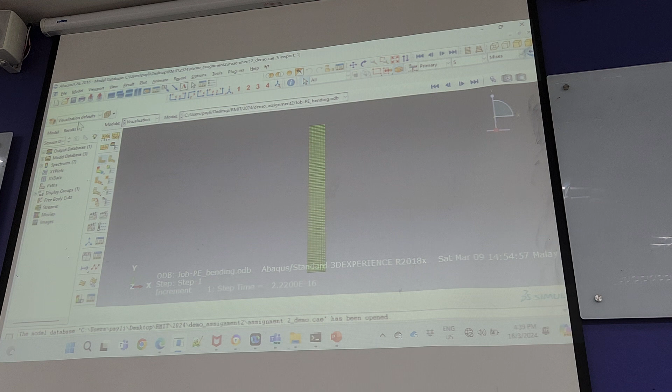Okay, class. I just want to say this very quickly. Okay, let's say this is the result that you have, right? You will see that there's a stress concentration here. You notice that there's a stress concentration here.

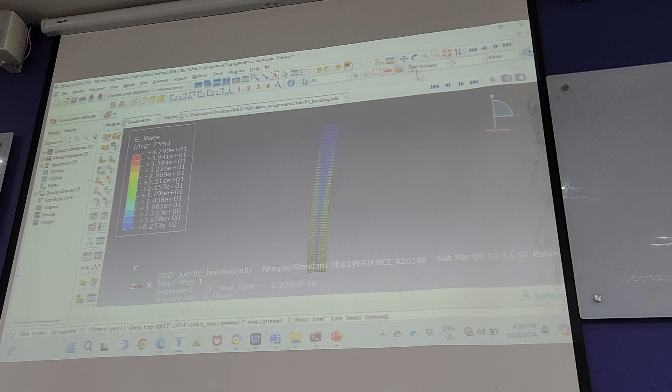There's a stress concentration here, okay? So does this result make sense? No, it doesn't, because we are adding it as a point load. In reality, it will be a distributed load, but for simplicity, we add it as a point load, okay? So first and foremost, that's why I wanted to put it as a bending stress here first, okay?

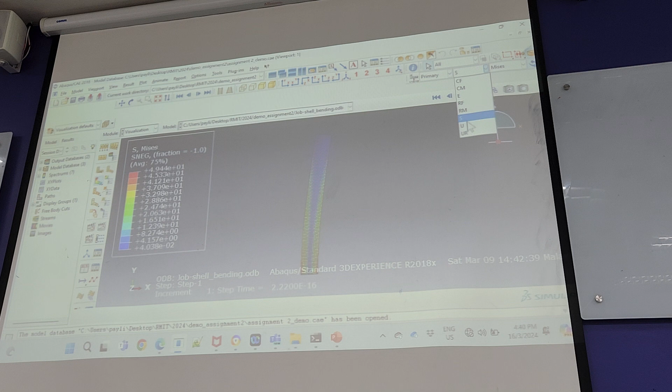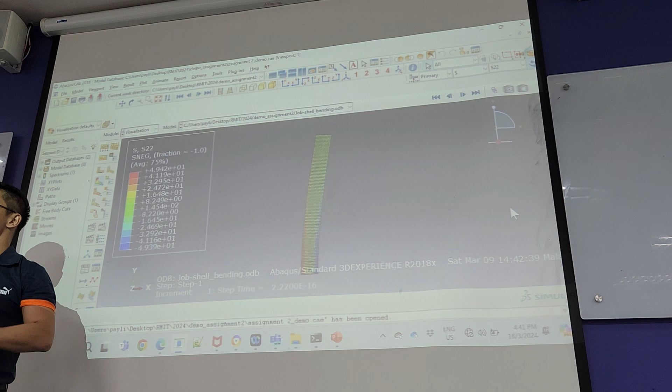This is for the shell model, okay? And you see, just now I showed you that there's a localized, very localized stress concentration, right? And that's why I did it as a pure bending load first, so that you can see that this is pure, before you make sense of the magnitude, because the magnitude will be a little bit off, within 10% or a few percent off, okay?

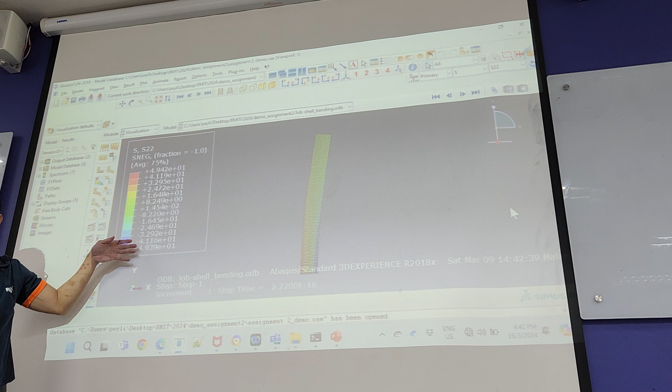But I did it as a pure bending load first, I would rationalize it this way: this needs to be performed as a pure bending condition first, whereby the compressive and tensile loads are balanced. So they show that it's a pure bending load, which is important. It's not easy to get the magnitude to be exactly the same. Sometimes it might be off for various reasons. But to do it as a bending load, that's why it's important.

For your case, your validation is up to you how you want to do it. But if you want to do it together with axial load, like the way I showed in the example, that's also fine. Then you need to justify why. It could be like what I said, the rigid body motion restraint. The thing I want to show you is here.

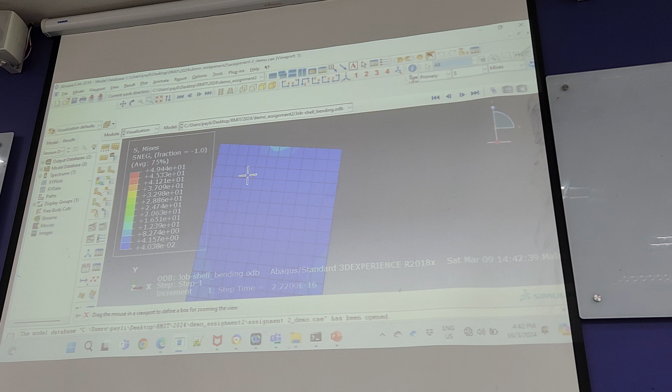Okay, so imagine the localized stress that we see here, at this point. Why does it happen? It's because, like I said, it's a single point. How do you resolve it? Does it mean that if I have a finer mesh, now I have 10 elements along the width direction, if I increase the number of elements, will it improve the situation? Yes or no? Why not? Because the small point will still have the same amount of stress.

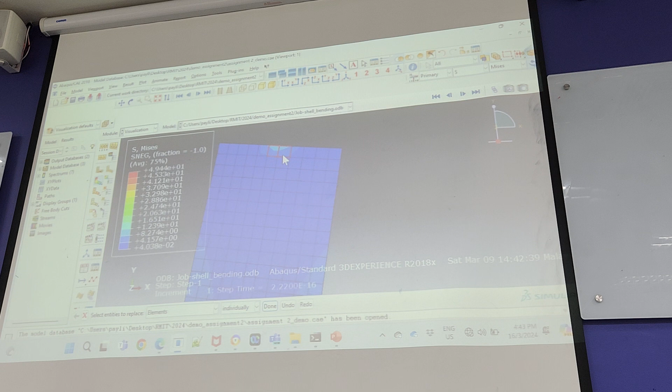That's one. Now you see, this is localized, right? So if I check the stress here, this stress is about 12 megapascal, correct? So it's still relatively small compared to the entire stress, but some of you will have a very different stress. So what will you do if your stress is too significant? I did it in the 3D model because it becomes very significant.

So what you do is you just remove that section, you remove the top section. Because I'm not interested in that stress there. I'm interested in the bottom here, the stress at the bottom. That is really artificial stress. But what I want to illustrate to you is, if you increase the number of elements, let me go back to mesh. It's just not shell, right? It's not shell bending, right?

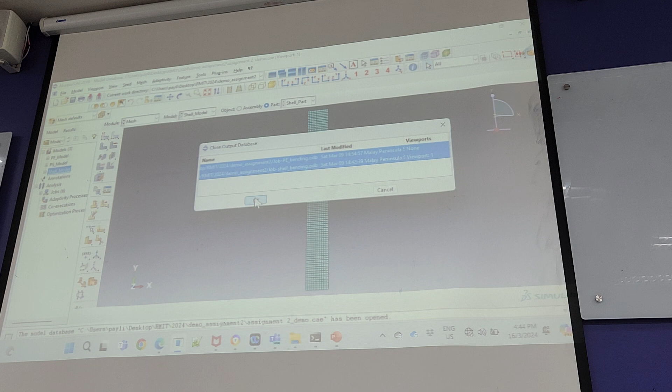Axial load together, of course, it will be higher. So you see now this is very high. Let's say if I were to look at only the stress in this configuration. The stress here is about 56 megapascal, which is quite significant compared to overall. So you see that now 56 megapascal is the stress at this location here.

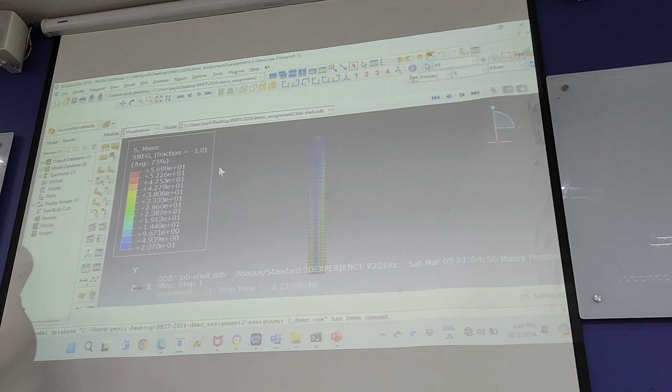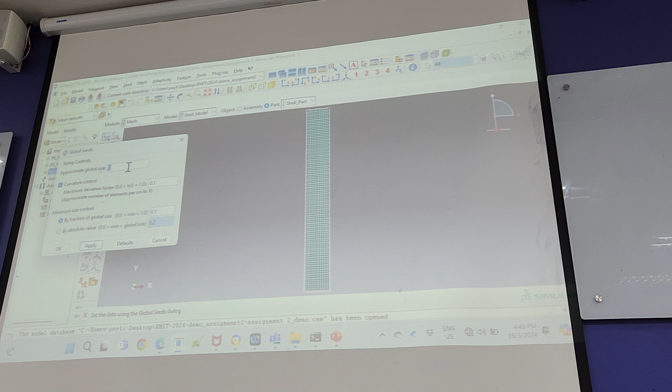So what is the actual stress? For the actual stress, we must remove the top part. So it's actually 54, not 56. 56 is because of the load at the top. And I want to show you something. Now, if I was to increase the mesh, just now, with the top, what is the stress at the top? 56. Yes. Okay, 56. Let's do it again.

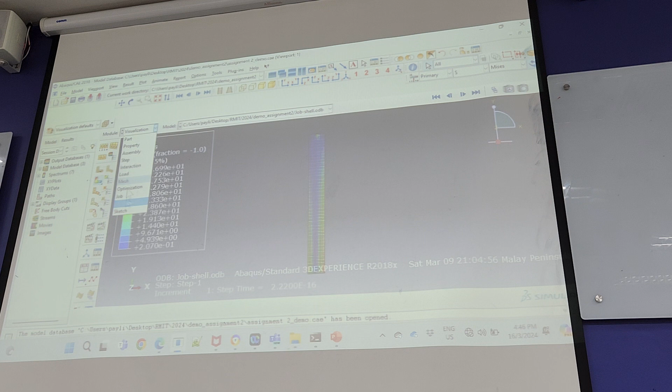6, right, at the top. I will ignore the top because that is an artificial stress. In reality, it will not be a point load. The answer is 4. Your actual resistance stress is 4, not 6. But with the top, 6. If I increase the elements, make it denser, previously it was 2, now I think it's 1. Okay, I run it again.

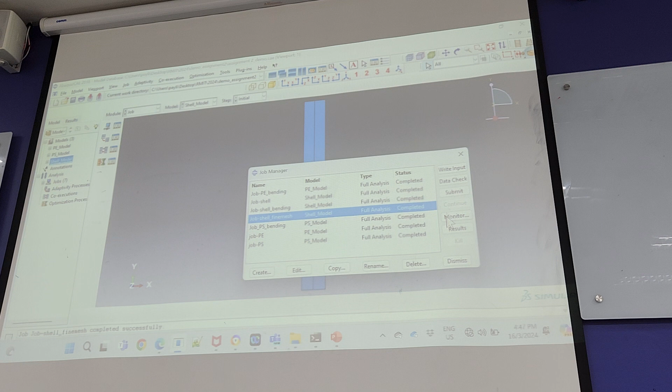Wait, before that, let's take a look at it. Just now it was what? Remember the stress? You see, 56. Now what is the stress here? 114 now. Let's zoom in now. Stress at the top is what? 114. So the stress increased by how much?

Double. Twice. Why? Because originally, when I told you it's an artificial load, you input a point load, there's nothing wrong with that. But in reality, nothing is applied as a point load, infinitely small, as a very fine point. No matter how much load you apply, there's always a contact surface. So that load will be distributed across the contact surface, but now you're assuming it as a point load, which is 0.001.

So that is 56. When I increase this density to something even finer, this is n equals to 2, this is n equals to 1. The global seed size is millimeter. That means this load will be handled by one element 2 by 2, and now by 1 by 1. So of course the contact surface shrinks by half. This is called localized stress. The localized stress will be even higher.

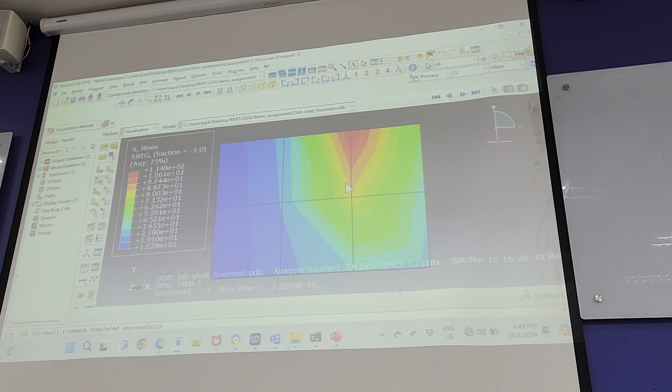You know what I'm trying to say? So this is the stress. That's why when you come out with the figure, suddenly the maximum result will jump, and it could be due to this localized stress. Most of the time your error is because you don't have sufficient mesh density. Just now we said 2 elements across thickness is not good. But if you have it too fine, you could have things like this, which is okay. We just need to remove the top layer.

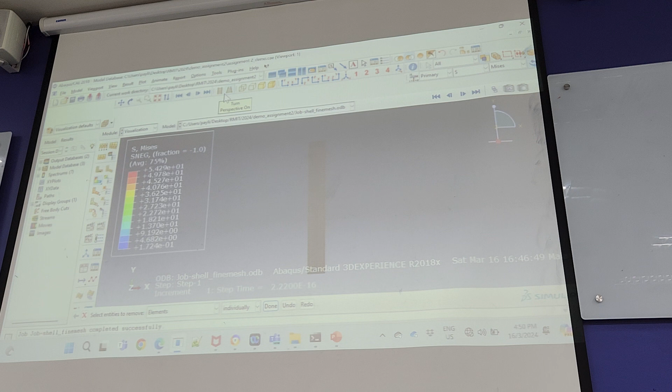If I was to remove the top, the result is exactly the same as what we had just now for the 2 by 2, 54. So the 54, which is the bending stress at the bottom, is correct. But by removing it, the deflection will get affected? I can't hear, somebody is talking right beside you. By removing it the deflection will get affected. No, only the stress.

No, you're right, it does affect. Do you all hear the question? By removing the top layer, deflection gets affected. Yes, it does, because your top will see the highest deflection. That's a very good point. So when it comes to the deflection, you shouldn't remove the top element. You should remove it only for the stress.

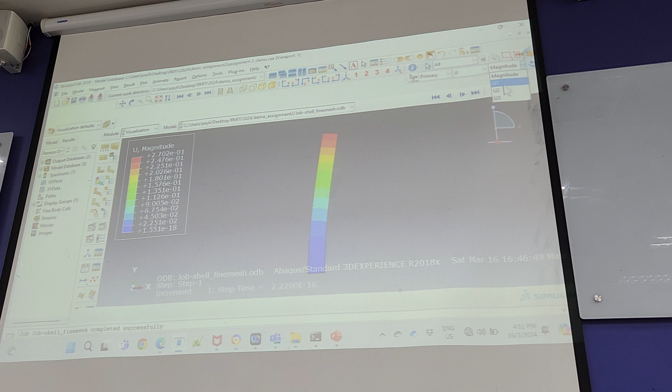So let's put it back again. Wait, let me finish first. If I go back to the displacement, the displacement doesn't see a concentration. Only the stress sees the concentration. You only remove it if there is a stress concentration. Now the displacement doesn't see anything. But if you go back to the stress, you see the concentration there. So it's only for stress concentration.

So is it going to affect the whole model? No, the model is the same. That removal is only for display. The model is still the same. It's just like zooming in to focus, like what I did. So next time I can just open the report and it becomes a normal one? Correct. Everybody understand that? That's a good point.

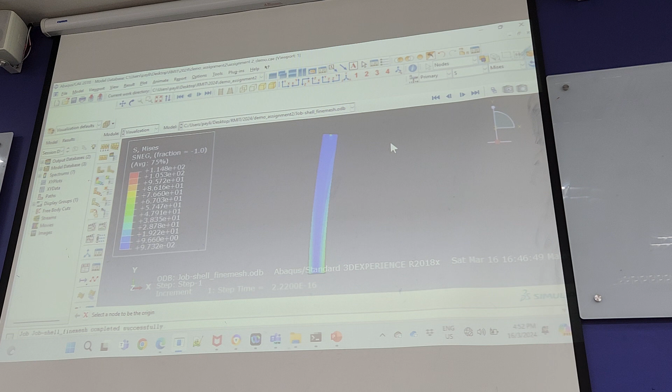Okay. So what I'm going to do now is, I'm done with assignment 2. I want to go through very quickly this entire module and a flavor of what to expect in your exam.

Yeah. So what you're going to have in the exam is 3 sections. Okay, one is on the calculation. Can everybody write it down? Okay, everybody write it down. One is on the calculation, which is your direct stiffness method, another one is on the beam and truss, and another one is on the plate and shaft.

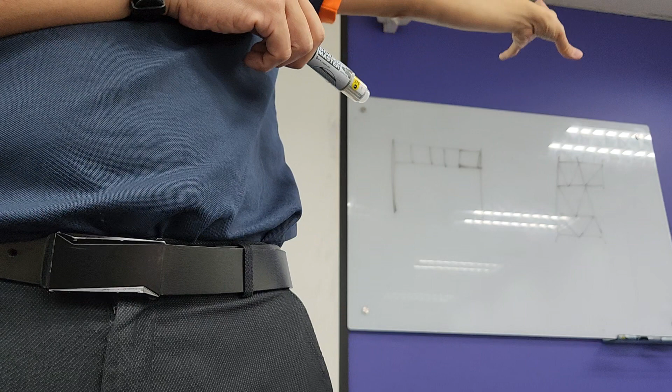Okay, so I want you to draw your free body diagram, and also what is the element, what is the model, what is the number of elements you need in each member, things like this. So I'm trying to help you to create the model first, and you can easily do this in Abaqus, correct? Go through the motion to think what you want to create in the Abaqus model, okay?

So I want you to know, number one, what is the free body diagram? Number two, what's the type of model? Okay, number three, element number. Okay, manually mesh, like how many elements you want over here. Okay, draw these two.

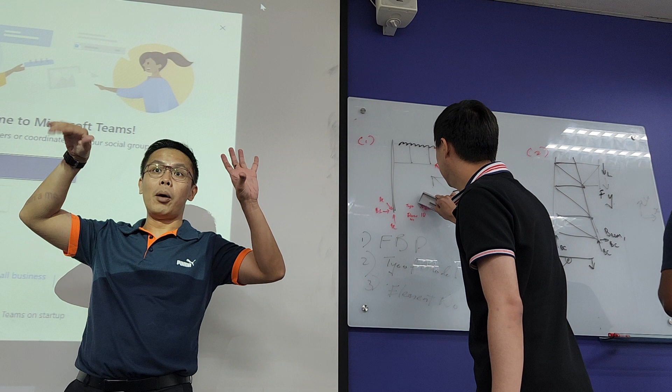And when I say the type of model, I'm asking you whether this is a truss model or a beam model. Okay? So the P is not important? No, it is important. Okay? The other thing is, remember when you create your part. You frown, I want to know if you have any question, because this is exactly the question you're going to have. When you see the question, then you ask yourself, is this in a 2D space or 3D space?

Who says it's 2D? Put out your hand. Who says it's 3D? Put out your hand. One more time, who says it's 2D? Put your hand up straight. Hurry up. 2D. Put it up straight. Commit to it. Who thinks it's 3D? Put out your hand.

Okay? This must be in a 3D space. Because in the 2D space you only have your X and Y. But in this case, the load is in the Z direction. Alright? So it must be a 3D space. Correct? Louder, I can't hear you. So my understanding is truss and beam models are in 2D space. So it can be done in 3D. Correct. When you create your part, you go to beam model, correct? Then it asks you 2D space or 3D space, correct?

Okay, then the third one, when I ask element number, I want you to manually discretize it. Manually cut it, like number of elements within each member. So you will draw how many you want within each member. Yes, all the members. I want you to manually draw it for illustration's sake, whether you're going to have one element or ten. You can just make a note there. You mean the node? No, the element, I want you to subdivide it, as good as you manually doing the mesh module here. Because this is where a lot of problems come in. Later you will see what I mean.

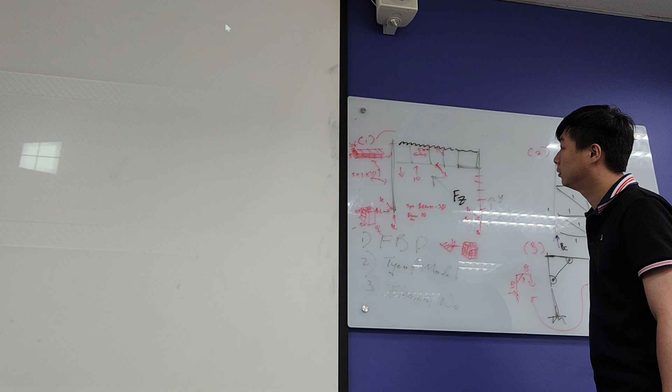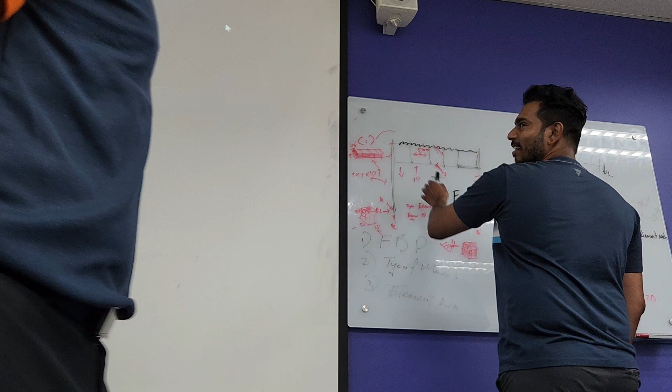Hey, I want to see everybody write something down. If not, we're not going to go through. It's not going to be right. Just write something first, then draw the boundary condition. Yeah. Then this one, talk about this one. Done? Can, go. No, what is the space? Give me space. Right now. Boundary condition now. Okay.

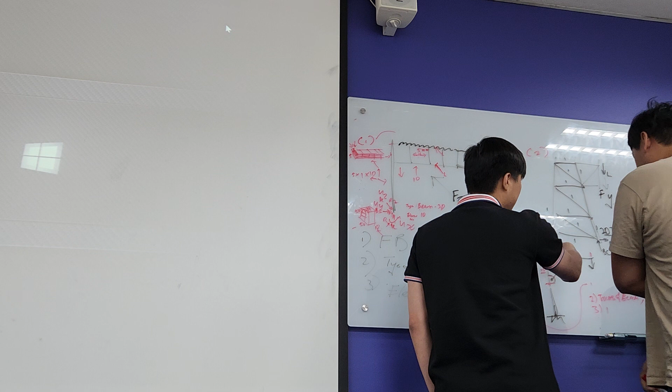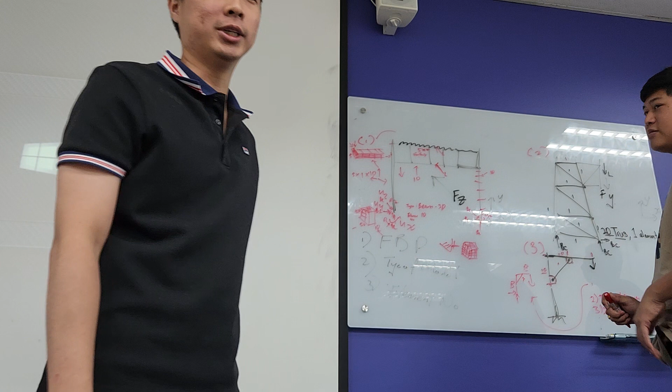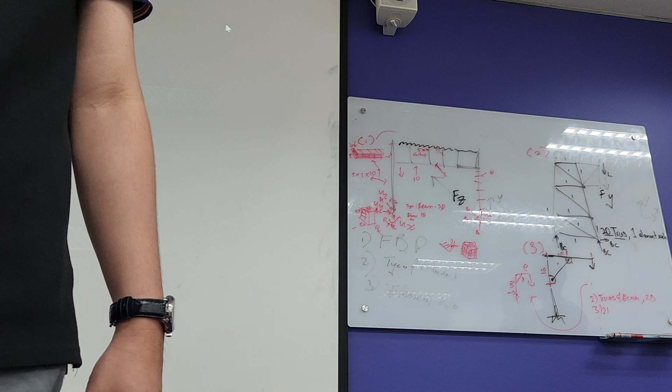Take the opportunity, right, to go through this. In the exam, you will be confused. So take the opportunity to write it down. Go through that thinking process. No, three of them go back. You all must explain later. Anyhow do. Can pass. You know what I say? Is it a beam or truss model? Which one?

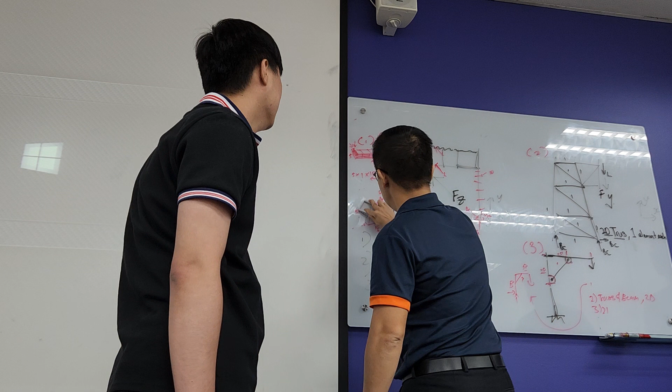Are you all done? Yeah, we're done. Are you all done? Done, huh? Okay, let's go one by one, huh? Who is going to be first? Question one first, huh? What? No, it's just my record. So do you still need it? Don't need, huh? You wipe away, huh? This one don't need, huh? Can you draw so that they can take reference on it?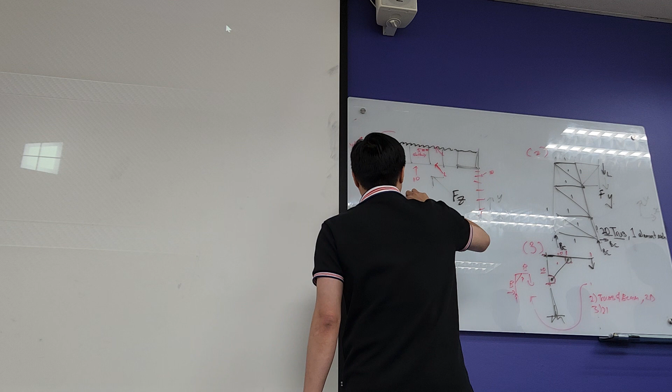Yeah, same thing you ask yourself. What is the question you ask? Whether is it a beam or truss model? Truss, because of the bracing. Hey, do you all want to listen to this? Okay. Why is it a beam or truss model? Truss. Why truss? Because of the bracing. Yeah, because of the diagonal brace. You see that it's stable, alright? Even if you put it as a truss, it's stable.

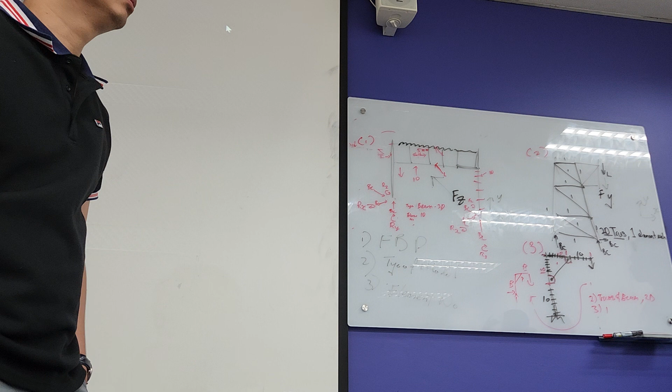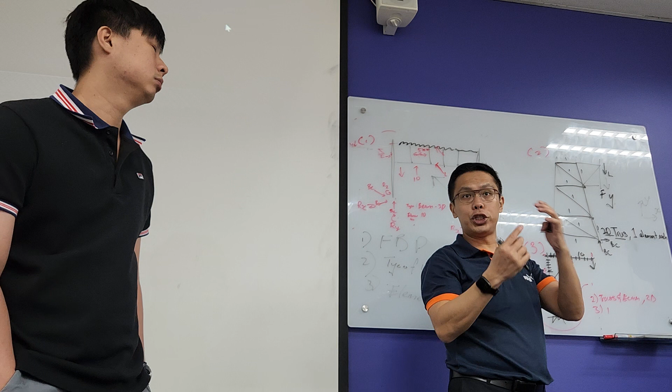Yeah. So in this case, the boundary condition, let's say if you're thinking of, let's say it's a basketball frame, right? So by right, here will also be restrained, okay? You will only have a roller condition, let's say in a bridge, where you physically see a roller there. You know, only certain things allow for expansion joint. You must have seen this expansion joint before, correct? You do see a roller at the end where it's allowed to expand. But in a basketball court condition, you know it's going to be anchored to the ground. So it will be fixed in both the X and Y direction. Correct? Okay, so this is the early part.

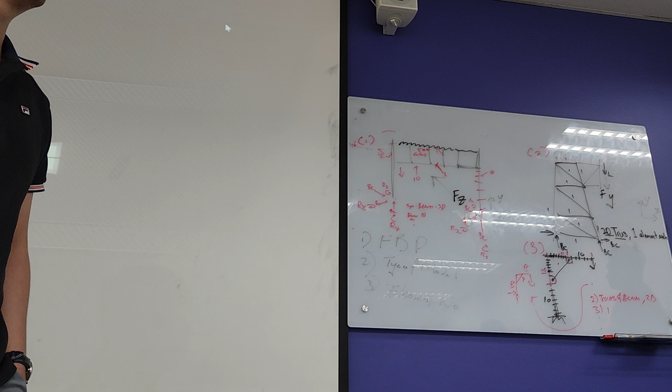Last one, number of elements. One each. Why? Truss. Truss is only one because there is no bending. Yeah, you all hear that? For truss model, each of these is one member. Alright? Each member for truss model, how many elements must you have? Huh? How many? One. Okay, so this is correct. Thank you.

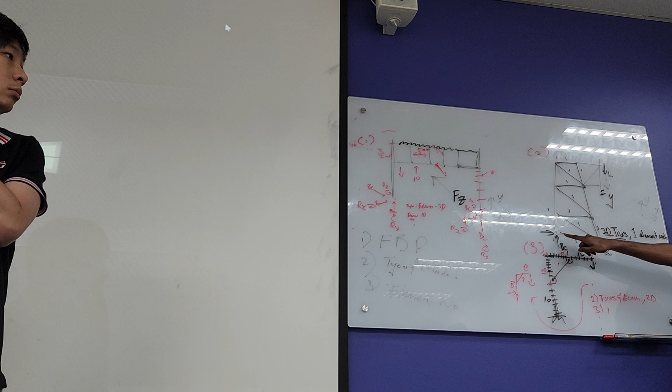So I will want to check already, then you will still ask questions. Do we still need to put the boundary condition for here or just one point? Both. So need to do both. So good. Can you say louder?

So for Abaqus, when we do the modeling, do we need to put a boundary condition for both ends or just one? For both points, right? Yeah. You need to put both. Of course, you need to put both. If you don't put both, then this part will slide out. Remember? It will move. So must you do both? Yes, you must, because you are restraining both conditions, right?

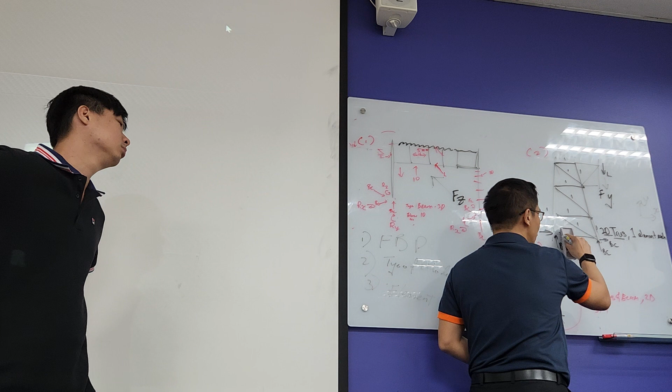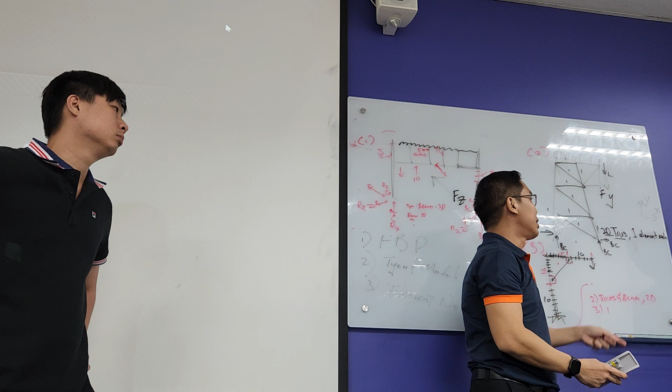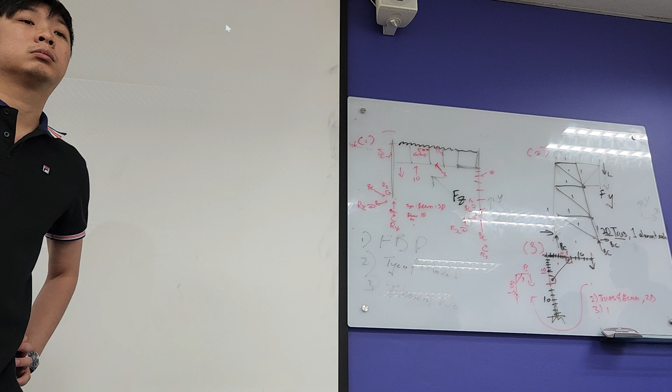By right, you do not need this member. Because both points are being restrained, you do not need the bottom member by right. Agree? Because it will not have any stress at all. There's no displacement. So that's assuming the member is basically at the floor, right? If it's slightly above, then it's still considered, as a bit of stress, right? You're right. But now you are drawing exactly at the bottom. So if you restrain here, you really wouldn't see any deformation at the bottom. It's a good point.

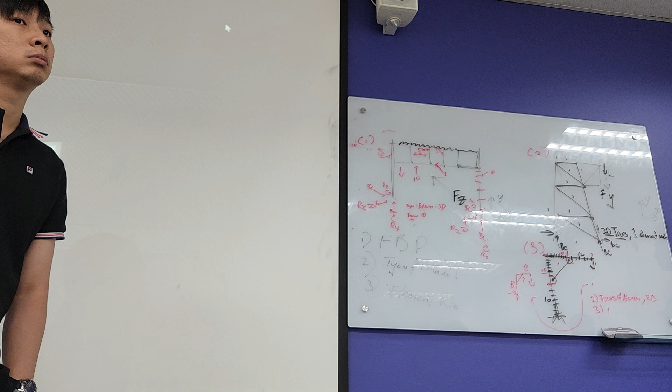Thank you. Hey, clap, eh? So it's a 3D beam. Hey, one by one, yeah.

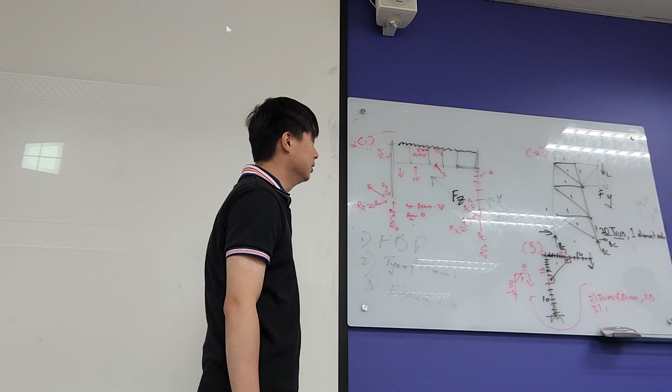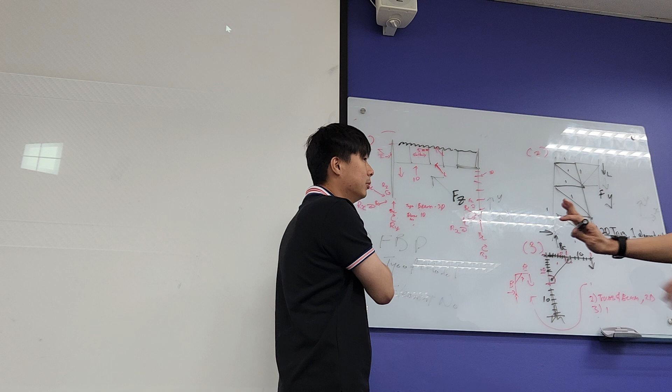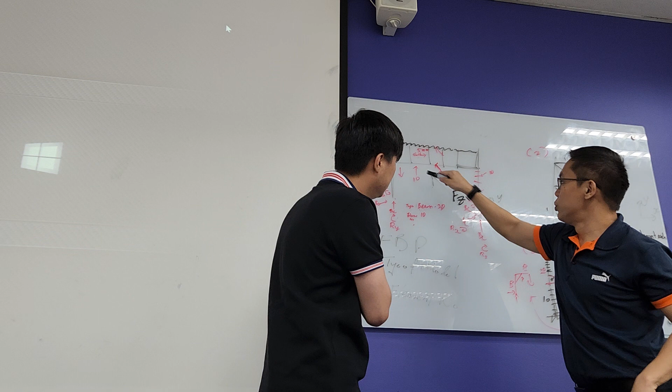So first thing is, is it a beam model or truss model? It's a beam model. Why? Because if it's a truss model, then this one will fail and collapse, no bracing. So in this case, it must be a beam model, correct? Because this is like a cantilever post. This is like a portal frame. Each member is like a propped cantilever. In order for this to be a truss, you need a diagonal brace in the middle, likewise throughout the entire truss, correct?

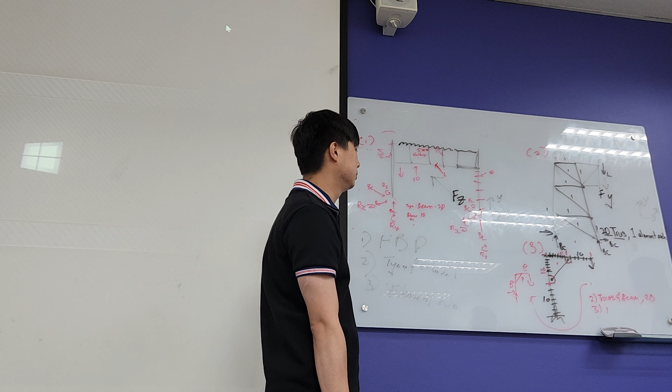So is this a 2D space or 3D space? This is a 3D space because it has a Z direction. You will expect the deformation to be in the Z direction and also the Y direction. It is free to displace in both X and Y, including the Z direction, because your load is in the Z direction. And you will expect it to move in the X direction also, because as you move in, this post might walk in this direction. So it will be free to move in all three directions, unlike question 2, where you only see a downward load, correct?

You all see that? If you don't understand this, in the exam, how are you going to answer this? If you can't even do this, how are you going to create the model? You know what I'm trying to say. That's why I want you all to go through the thinking process at this point in time.

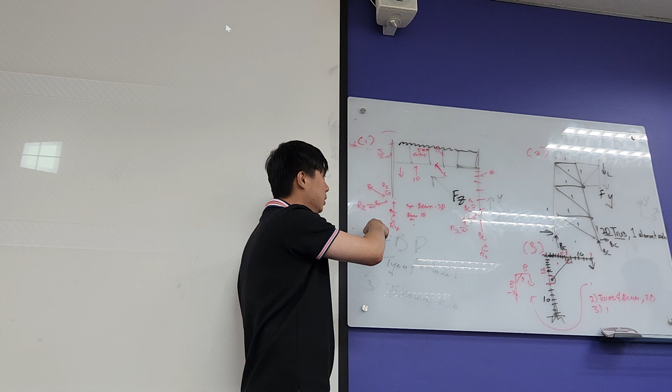Continue. Then the force is coming this way, so I pinpoint two loads. Then instead of the whole area, we point to the point. Then the boundary condition will be placed at the bottom, restraining everything, so rotation in every axis and also XYZ axis. Do you all hear that? You need to restrain the rotational degree of freedom, because it's a cantilever, so you must restrain it rotationally in all three directions. Make sense?

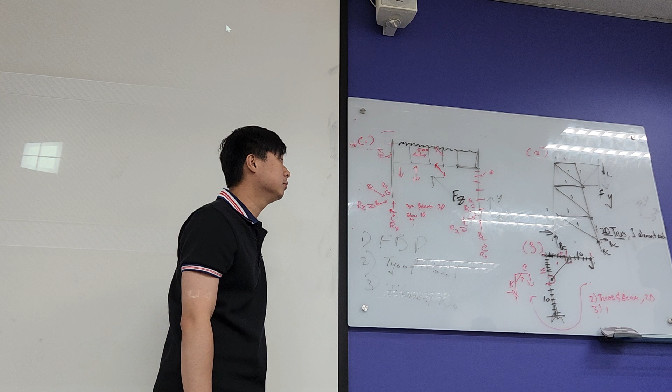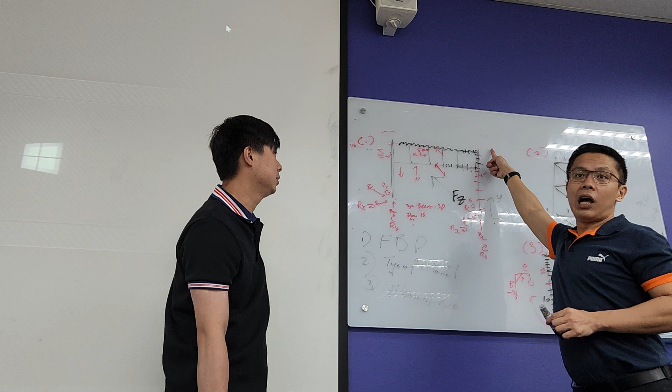Then lastly, 10 elements per member. By right, what I want you all to draw is to show this. Everybody remembers to do it here most of the time, but you must also do the 10 elements here. Why? Because in your global seed, you only assign one number. Here, from the total length, we know how much to assign. For example, if this is 1 meter, then you put 0.1 meters. Do you hear that? If this is 1 meter, how many do you put? 0.1. If you put 0.1 here, we only have one element.

But it doesn't make sense if this is only one member, one element. This must be at least 5, 6. I don't need it to be strictly 10. Nobody is going to tell you it's going to be strictly 10, it depends on the condition. But it can't be 1 or 2 for sure. You know what I mean? So that's exactly the problem.

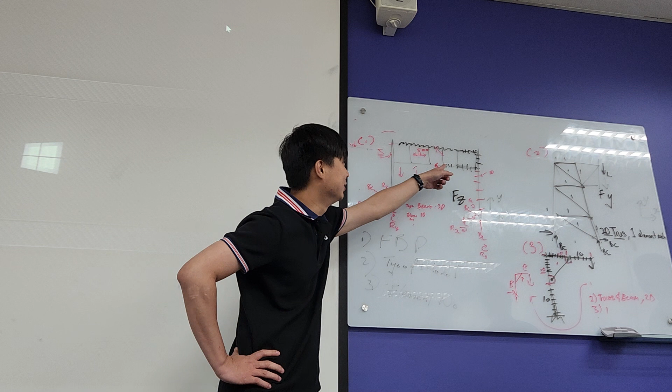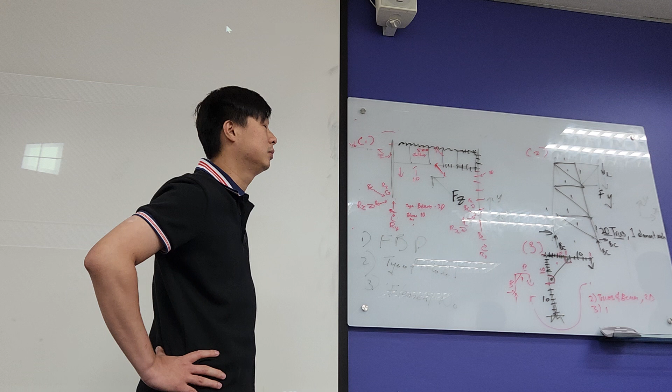This is 1 meter. Your global seed cannot be 0.1 because here it will become 1 element. So I would say this whole thing is 10, this one is 5. So we do a local seed. You can do a local seed, correct. And it's going to be very fast anyway for a beam model, so it doesn't really matter. Good job. Thank you.

Do you all understand the first 2 questions? Okay, let's do the third one. So my boundary conditions is also... Wait. Is it a beam or truss model? It's a truss and beam model. Which one is the beam, which one is the truss? These will be the beams and the truss. Do you all see that? Because it has bending, the post and the beam must be beam members, whereby it's allowed to deform with a curvature.

Then this is a 2D model. The diagonal brace will be a truss, correct? Because it's hinged at both ends. Why is it 2D? Because this is supposed to be Y, so it's only Y and X. You only have a deflection force in the y direction, so you only expect xy direction deformation, correct? Then the boundary conditions will only be Ux and Uy.

Other than this and this, you also need to restrain rotationally. Alright? Then what about the number of elements? Because of the truss here, we have to segregate into different parts. So this side, and then one for the truss. Yes. You all get that? Okay, thank you. Sorry?

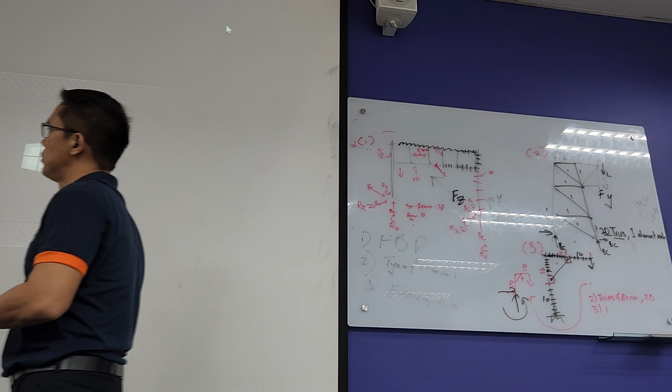Not straight enough for you, is it? Huh? Is it? Who is confident you all can come up and write, huh? Ask the same question I asked you just now. What are the same three questions I asked you? Anybody want to volunteer? Anybody? Have you all done it already?

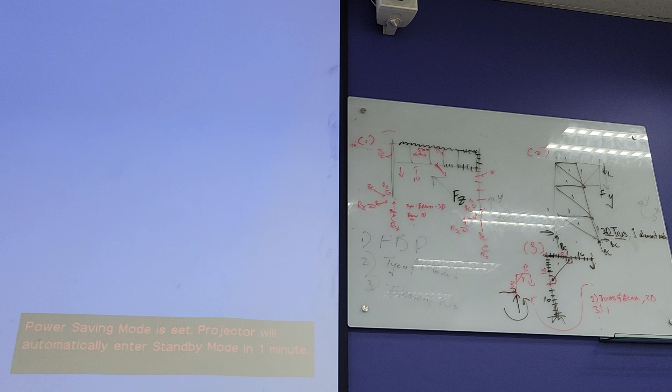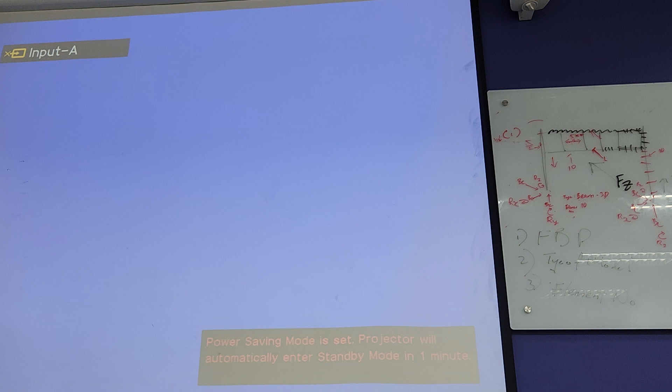We say this is a 2D space or 3D space? It's okay, it's okay. 2D. Why 2D space? Who thinks it's a 2D space? Put up your hand. Who thinks it's a 3D space? Put up your hand. Who never put up your hand? No, serious. I want you all to understand. If you're not clear, you need to think about it. If you're not clear, it's fine. Okay? Got to be 2D or 3D space? A class, 2D or 3D?